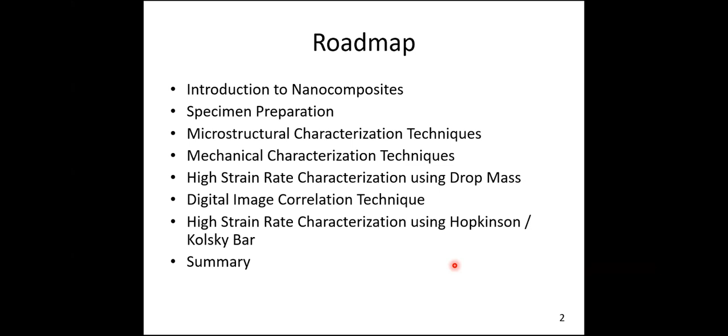So you all know what is nano. Particles having one or more dimensions of 100 nanometers or less, whose physical and chemical properties differ measurably from those of the bulk material, are called nanoparticles. I hope you all from mechanical background know what a nanoparticle is.

There are so many nanoparticles available, and people are doing research on them. Examples include nano clay, nano alumina, and carbon nanotubes. So there are many different types of nanoparticles.

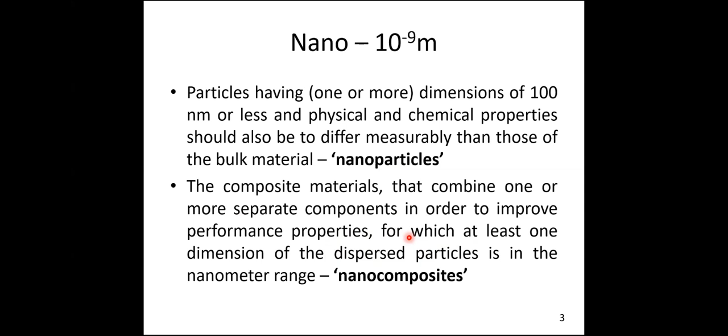Now, what are nanocomposites? In order to improve the performance of composites, if any one dimension of the particle is dispersed in the nanometer range, then it's called a nanocomposite. For example, I can add nano clay with epoxy, and that is called a nanocomposite. Similarly, I can add carbon nanotube with epoxy or polyester, and call it a nanocomposite.

An example is nano clay. Again based on geometry, for nanotubes, the diameter of the tube is at the nano level, while the length of the tube is at the micrometer level, so it is also a nanofiller. Third, we have 3D nanoparticles - spherical, cylindrical, cube - many types available in the market. So based on geometry, we can have nano layers, nanotubes, or 3D nanoparticles.

This is a quick intro about the different types of nanofillers based on geometry.

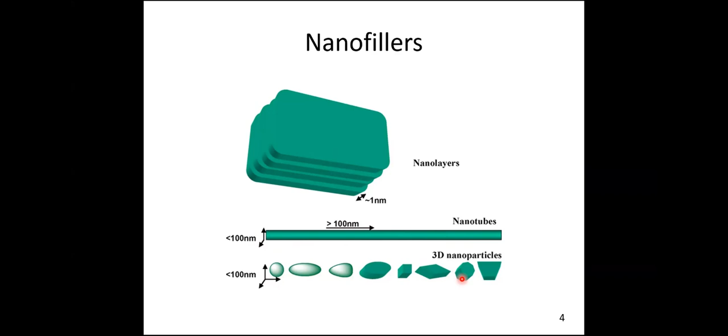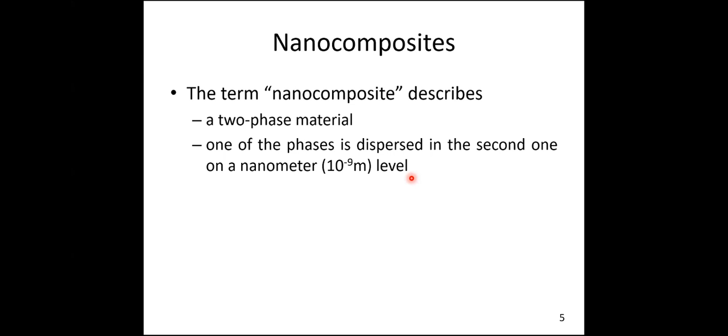So again, as I mentioned earlier, what is nanocomposites? It is a two-phase material where one of the phases is dispersed in the second one on a nanometer scale. So this is called nanocomposites. In today's presentation, I am going to use epoxy as a matrix and nano clay as a nano filler. So it is called nanocomposites, a two-phase material.

So I have given a quick summary about the nano clay. It is also called layered silicate. As I mentioned earlier, it looks like a thin layer, where the thickness of the layer is in nanometers and the length and breadth of the layer is in micrometers. It has about 1 nanometer thickness approximately, and the lateral dimensions may vary from 30 nanometers to several microns.

Because of this thickness and lateral dimension, we can get high aspect ratio. That is why we can achieve very good mechanical properties with the addition of nano fillers in the epoxy. The adjacent layers are separated by a regular van der Waals gap. It is called interlayer. We are going to see this in detail in the upcoming slides.

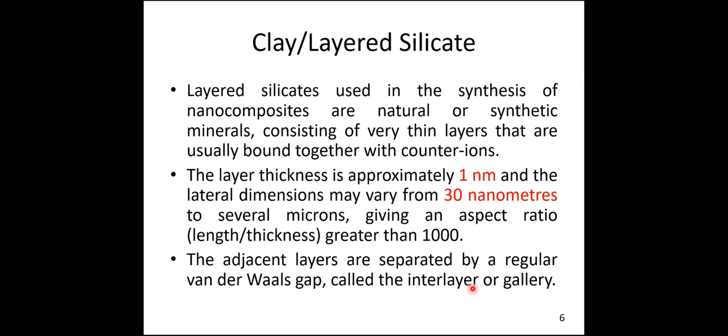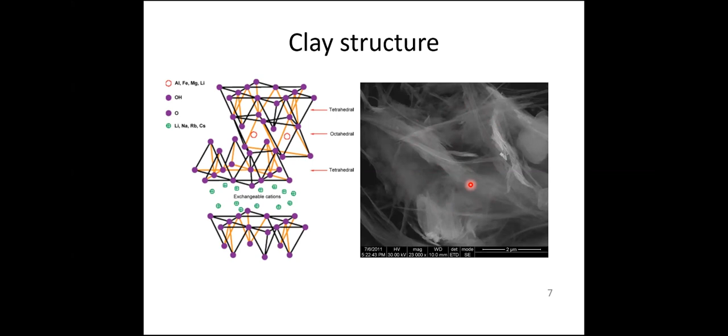Now, types of nano clay. Again, there are so many types. Based on that, I don't want to go in detail. But in this study, we are going to use Montmorillonite clay. It is one type of clay which is commercially available. So in this study, I am going to talk about this MMT clay.

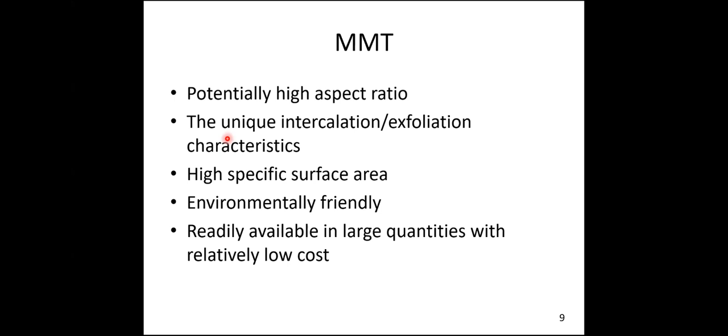So why MMT? Again, there are so many reasons from the literature. It has high aspect ratio. It has unique intercalation and exfoliation characteristics, and it has high specific surface area. It is environment friendly, and it is easily available in large quantities at low cost. Because of this, this Montmorillonite clay is popular in composite research.

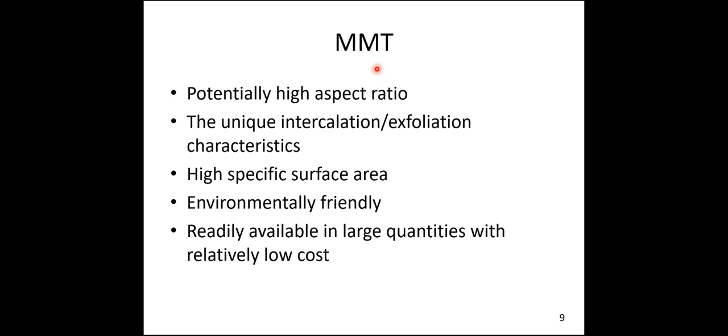So there are so many commercially available clays in the market. I have summarized the commercial names of the clays, starting from Cloisite. It has several types under Cloisites, and Bentone, Nanomer, Nanofil, Dellite. Like that, there are so many commercially available clays available in the market.

In this study, we have used Garamite 1958. This is a commercial name from Southern Clay Products, USA. This Garamite is nothing but a modified Montmorillonite clay. So we have not used a raw clay, we have modified the clay. That is called Garamite, a commercial name. So this is the clay we have used in this study.

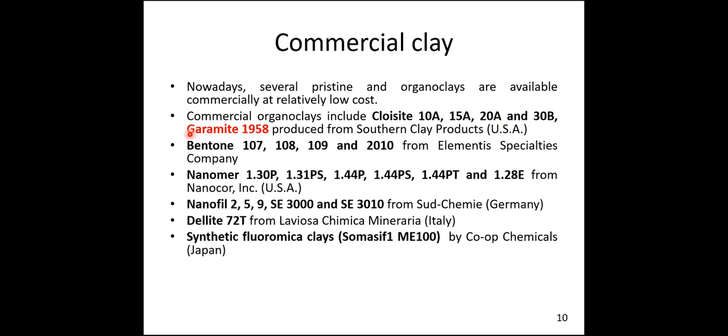Now coming to the dispersion structure. So now I have a clay like this, already mentioned it is in layer form. I can take a pinch of nano clay and mix it with the polymer. The polymer could be any polymer, thermoplastic or thermoset. Here we have used thermoset, that is epoxy polymer. So when I mix the nano clay with the epoxy matrix, what would be the outcome?

So here I have shown, we can expect three different kinds of dispersion types. One is phase separated or microcomposite, another is intercalated where the clay is mixed in an agglomerated stage, and this is exfoliated.

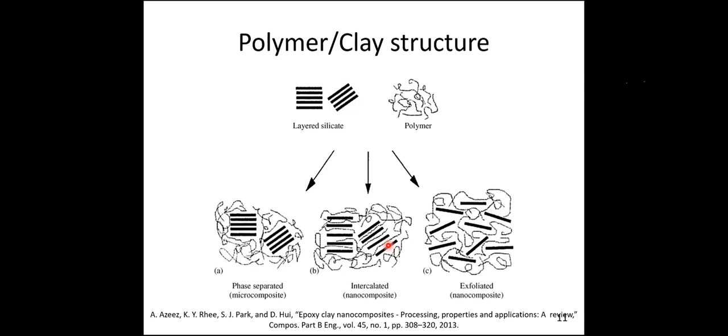So here if you see, the nano clay is dispersed well in the epoxy, so this is the good dispersion we can say. But here, if you see, all the clay has been arranged in a parallel fashion, so this is not good. So these are the three kinds of outcomes we can achieve once we mix the nano filler with the polymer. Let us see one by one in the upcoming slides.

So, history: this nano clay was discovered by the Toyota Group from Japan. These guys were the first to try nano clay with polyamide matrix, and they found good improvement in the mechanical properties by adding nano clay with polyamide. Later it was extended to other polymers, to epoxy, polyester, and so on.

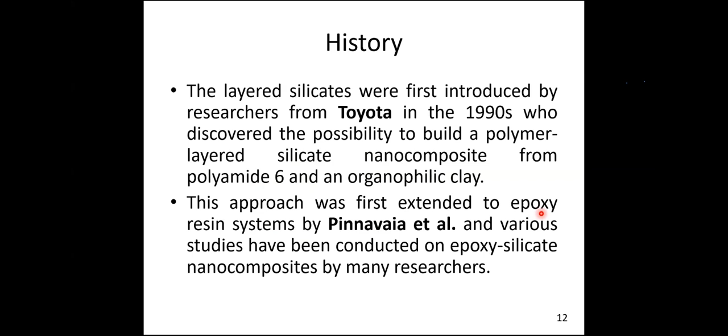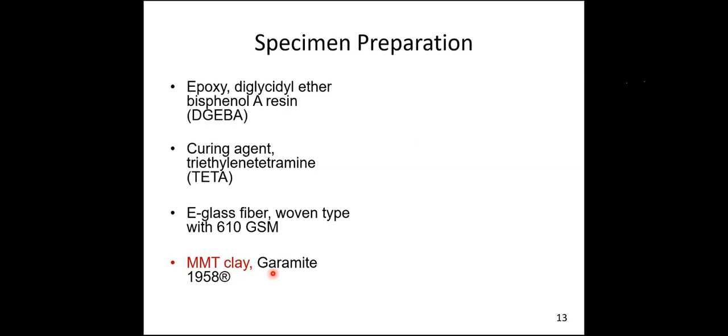So now how to prepare the composite sample? We need a matrix, so we need a polymer. As we are doing this study for aerospace application, we have chosen a DGEBA resin, that is diglycidyl ether bisphenol A resin, which is aerospace grade resin, and we used triethylenetetramine as a curing agent, and also we used typical E-glass fiber in order to understand the effect of clay in composites. And again, as I mentioned earlier, we used modified montmorillonite clay. The commercial name is Garamite. So these are the materials which we have used in this study.

Now I have an epoxy, I have matrix, I have a nano filler. So by mixing the nano filler with epoxy, I will get nanocomposites.

Now, as I mentioned earlier, we cannot blindly mix the clay with epoxy. So we need to take some different clay content. Based on literature survey, we have chosen 1.5 weight percentage, 3 weight percentage, and 5 weight percentage as the nano clay. That means, for example, if I take 100 gram of resin, I can take 1.5 gram of nano clay and then I can mix. So this is called 1.5% epoxy clay nanocomposite. Similarly, I can have 3 weight percentage nano clay epoxy nanocomposite and 5 weight percentage.

You may ask a question: why have I chosen 1.5, 3 and 5? Why have I not gone beyond 5? The reason is, as I mentioned earlier, it is nano fillers. So if I increase the clay content, then we may not mix the clay well with the epoxy. That is why we stopped with 5 percentage. So we have chosen 3 different weight percentages in order to understand which content would be the optimal content for getting better mechanical properties.

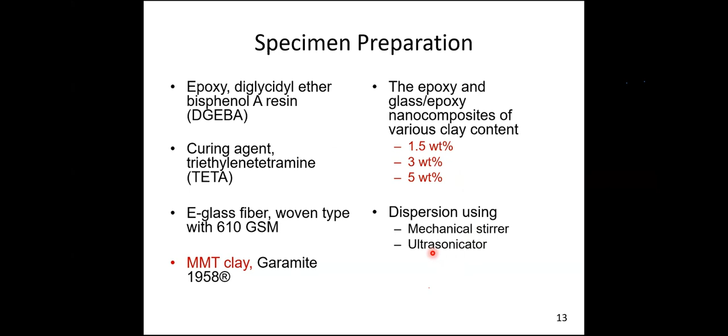So now I will cover these 4 topics. Microstructural characterization.

I wanted to emphasize, why should we go for microstructural characterization? The reason is, as I mentioned earlier, we are dispersing, we are mixing a nano level clay in epoxy. So we need to understand how it is dispersed in the epoxy. As I mentioned earlier, it is a nano size. We cannot see it with the naked eye. So we need to go for some microstructural characterization.

By using these techniques, it is possible for us to understand the quality of dispersion of clay in epoxy. So from that we will understand whether the clay is mixed well in the matrix or not. For that reason, we have used these 4 different techniques. I will be going one by one.

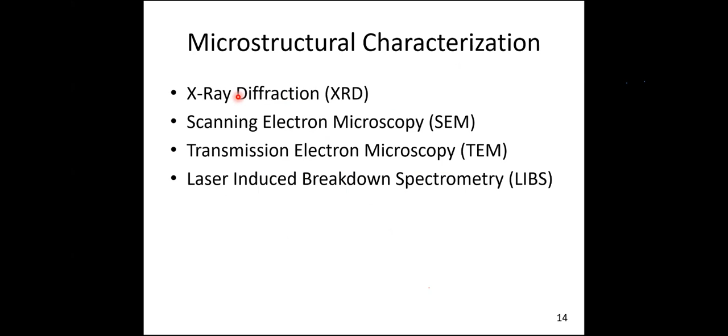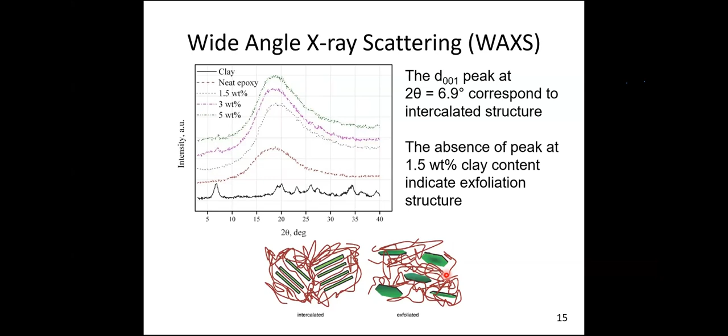Whereas, if you see, this is exfoliated structure. Again, for 1.5% there is no peak, which indicates that the clay is mixed well with the epoxy. That means the distance between the 2 layers is more than 7.75 nanometers. So that is the meaning, that it is dispersed well. So from the XRD, we were able to confirm that 1.5% clay is dispersed well with the epoxy.

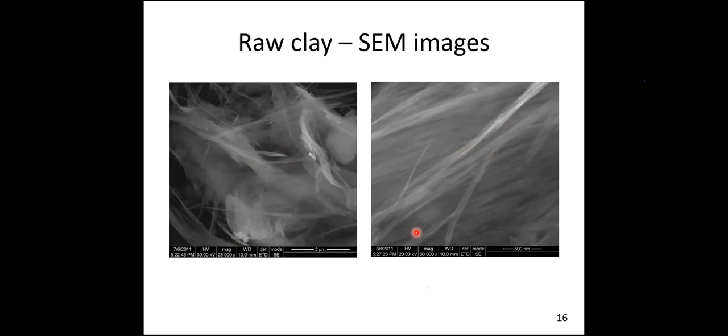So again, this is a typical scanning electron micrograph of raw clay at different magnifications. It is at low magnification around 23,000x, whereas here it is 60,000x. It is not dispersed with epoxy, it is just raw clay. I just wanted to show how clay looks like. If you see carefully, it looks like a layer. It has a nano size thickness and micron size lateral dimension. So basically it is typically a layer, like a sheet of paper. So this is what we could see from the micrograph.

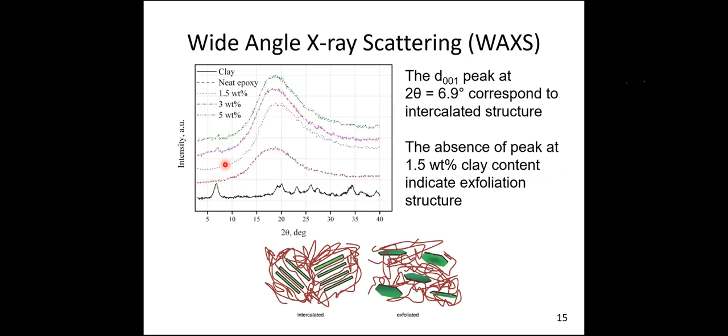We also performed small angle X-ray scattering. The idea is, as you saw in my previous slide, my first peak was observed at 6.9 degrees, but we could not go below 5 degrees. For that reason, we went for small angle X-ray scattering, so we could access smaller angles.

Here you could also see that black is clay, red is 1.5, where 1.5 doesn't have any peak, which means the clay is dispersed well with epoxy. The 3 and 5 compositions have a peak at around 5 degrees, which means the dispersion is not good, it is agglomerated.

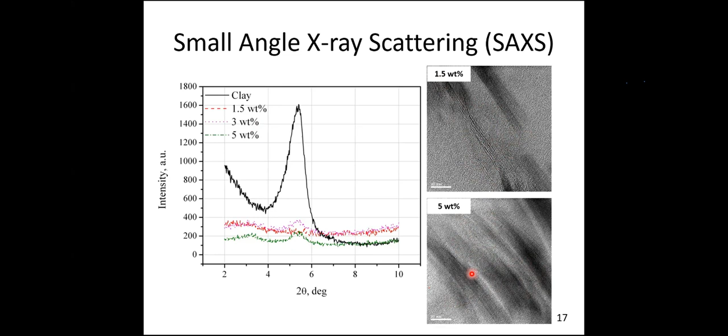This is a TEM, the micrograph from transmission electron microscopy. For 1.5 weight %, you could see it is dispersed nicely, whereas at higher clay loading, you can see it is agglomerated. This is what we could see from the XRD and transmission electron microscopy.

Also from scanning electron microscopy, we wanted to understand the composition of the nano clay epoxy composite. It has basically magnesium, aluminum, and silica.

We also tried laser induced breakdown spectroscopy for our research work. This study was also used in the Chandrayaan mission, so I had the opportunity to do this testing under the guidance of Professor Nilesh from IIT Madras.

From laser induced breakdown spectroscopy, we could see the epoxy has hydrocarbons, whereas the epoxy clay has magnesium, silicon, and aluminum. These are the alumina, the main composition of the clay.

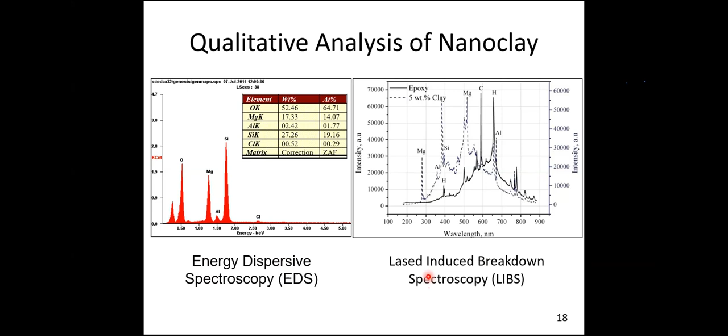This we have confirmed from EDS and LIBS, that is energy dispersive spectroscopy and laser induced breakdown spectroscopy. So we have just confirmed the composition of epoxy and clay.

This is a small study. We wanted to understand the effect of clay, and we were curious to know the energy required for the laser plume. So we did it for two different samples: one epoxy clay, the other glass epoxy clay.

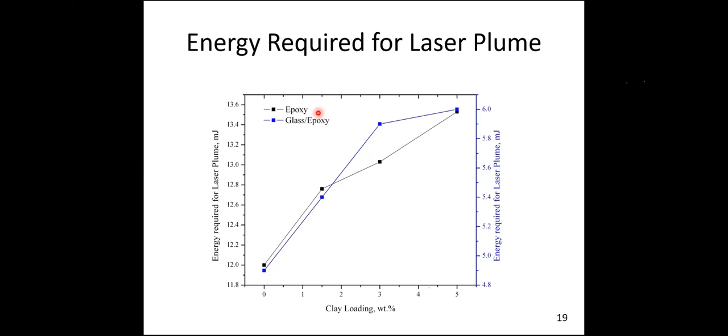On the left hand side, for epoxy and glass epoxy, it requires less energy to make the laser plume, whereas if I add the clay, it needs more energy to get the laser plume. This is what we could see from this graph.

So now we have finished the microstructural characterization. From the XRD, that is X-ray diffraction, and from transmission electron microscopy and scanning electron microscopy, we have understood the dispersion of clay in epoxy. We noted that 1.5 weight % clay gave good dispersion, whereas 3 and 5% gave an agglomerated structure. This is what we found from the microstructural studies.

So now the samples have been prepared, and the dispersion of clay in epoxy has been understood. Now we need to go for the next level, macro level testing. The main aim of adding the nanofiller with epoxy is to improve the properties, and that is why we prepared all these samples.

Now we are going to see, in a nutshell, the effect on mechanical properties, thermal properties, and electrical properties with the addition of clay in epoxy. Let us go one by one.

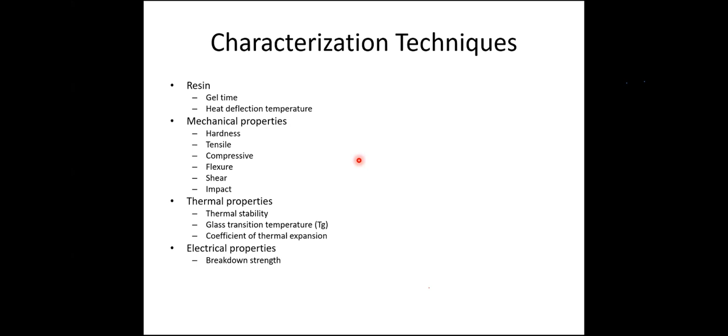I have not gone into detail, and I am not going to go into detail. I just want to give a glimpse of what kind of improvement you get with the addition of clay. This is what I wanted to focus on.

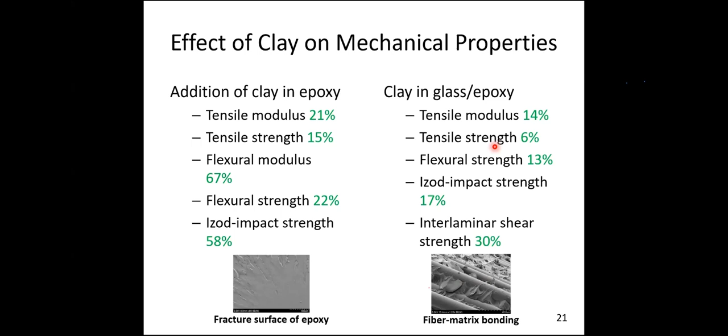If you see the bottom figure, this is a scanning electron microscopy image of a failed sample. Because of the addition of clay, one can see a strong bonding of matrix with fiber. Because of this strong bonding, we could get better mechanical properties due to the addition of clay in the glass epoxy composite.

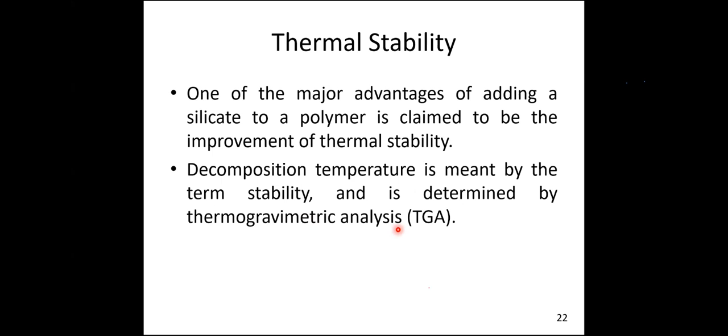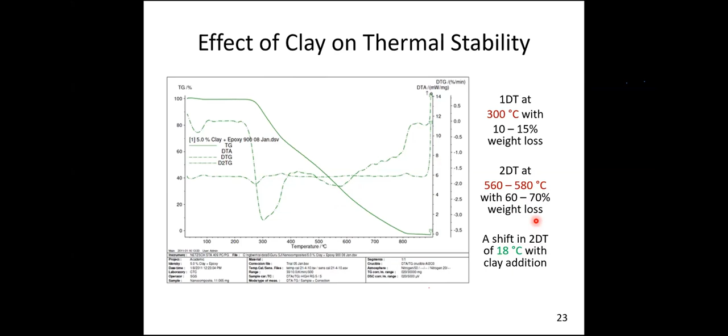So what is the outcome? With the addition of clay in epoxy, we could see a shift in the decomposition temperature. Because clay is a ceramic material containing silicon and alumina, we got better thermal stability. This is what we found from the thermal properties.

Then coming to electrical properties. We have already seen the effect of clay on mechanical properties and thermal properties. Now finally we come to electrical properties. We made different samples, epoxy samples and clay epoxy samples, and applied a high voltage to see its breakdown voltage.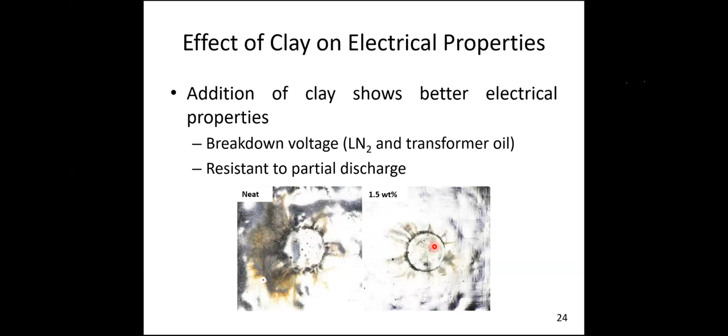If you see the photograph of the neat epoxy without clay, there is major damage, whereas on the right hand side, the 1.5 wt% clay epoxy shows minimal damage. Because of clay, the breakdown voltage is increased with the addition of clay in epoxy. This is what we found from the electrical properties of epoxy clay nanocomposites.

So we have seen, quickly I'll give you a summary of what I have discussed so far for better continuity. Initially I talked about nanofillers, nanocomposites, and the history of nanocomposites, then how to prepare nanocomposites and the raw materials. Then I talked about microstructural characterization starting from XRD to SEM to TEM, and we have seen the effect of clay on mechanical, thermal and electrical properties.

So now we have understood what a nanofiller is, how to prepare a nanocomposite, and how to do the characterization of nanocomposites. We have also noticed that the addition of nanofillers in the matrix leads to significant improvement in mechanical, thermal and electrical properties.

Now I'm going to take you to some advanced characterization techniques, which is the main agenda of today's talk. I'm going to spend some time on this. I hope all of you are aware about strain rate. Here I have given a brief summary about strain rate. In general, composites are rate sensitive.

For example, when I pull the sample slowly, I will get some kind of mechanical property, a tensile property. Similarly, when I pull the sample at a high speed, rapidly, the properties may differ. This is called rate sensitivity.

So I will come to this point: why do we need to understand the rate sensitivity of composites? Let us go one by one.

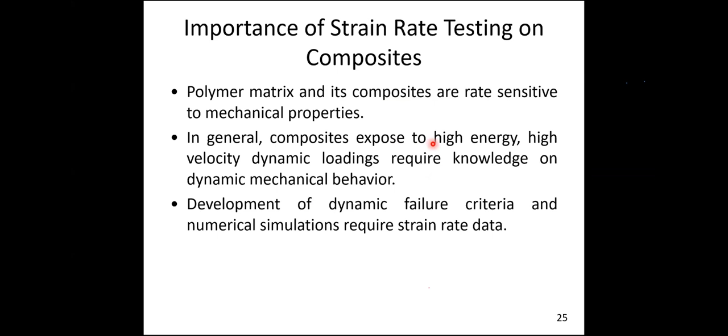So here I have shown how to carry out studies using different experimental techniques. One is the conventional loading frame, which is available in institutes, the basic UTM, universal testing machine. With that, you can achieve low strain rate. And if you have a servo-hydraulic testing machine, you can achieve medium strain rate. We can also use a drop mass setup to achieve intermediate strain rate, around 100 to 1000 per second.

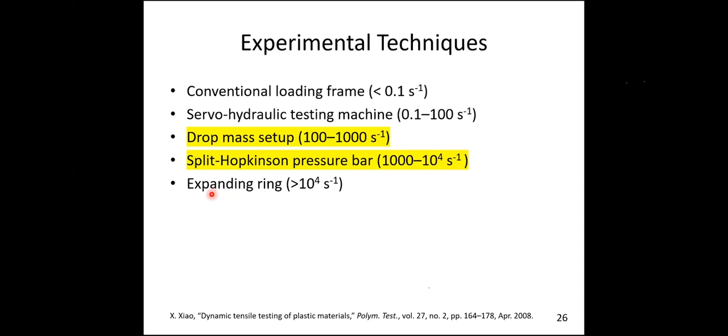And to do high strain rate, very high strain rate studies, you can use the split Hopkinson pressure bar, or Kolsky bar, where you can achieve up to 10,000 strain rate per second. And if you want to do ultra high strain rate, then we can go for the expanding ring technique, that is above 10,000 per second.

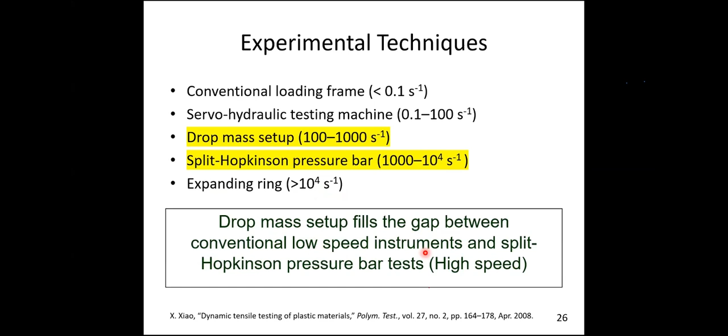So in this study, I'm going to focus on the drop mass setup. This is a nice technique which fills the gap between the conventional low speed and high speed instruments.

So now here I have given the strain rate regime. As I mentioned earlier, the low strain rate is categorized from 10 to minus 6 to 10 to minus 3 per second. It's called quasi-static. So we use conventional cross-head devices, and from this we determine the properties of samples, say tensile strength or tensile modulus, and so on. So this is called quasi-static testing.

And for medium strain rate, it is intermediate. We use servo-hydraulic machines and drop mass. The example is plane crash. This is the typical example. So when two planes crash at this junction, the material may experience this intermediate strain rate. So this is what I wanted to convey. So it is ranging from 10 power minus 3 to 10 power 2.

Again, high strain rate ranges from 10 power 2 to 10 power 6, where we use Hopkinson pressure bar. The application is bullet impact and blast applications, where this high strain rate will be experienced. Again, for ultra high strain rate, we use Taylor impact and plate impact, with applications like nuclear explosion. In these areas, the material may experience ultra high strain rates.

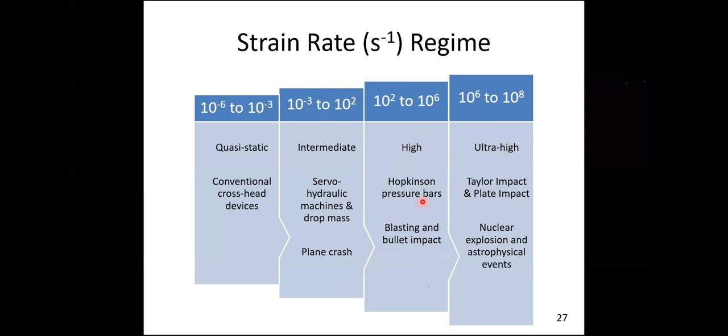Before that, you should understand what is strain rate. It is nothing but the crosshead speed divided by the gauge length. The gauge length is in millimeter, and the speed is in millimeter per minute or per second. So when you divide, you get strain rate. So this is what I want to convey.

So with the help of a drop mass setup, we can achieve from 10 to 1000 per second strain rate. It is inexpensive and can accommodate different geometries, so we can get different variations of strain rate. This is the typical drop mass setup which was developed at IIT Madras. You could see here.

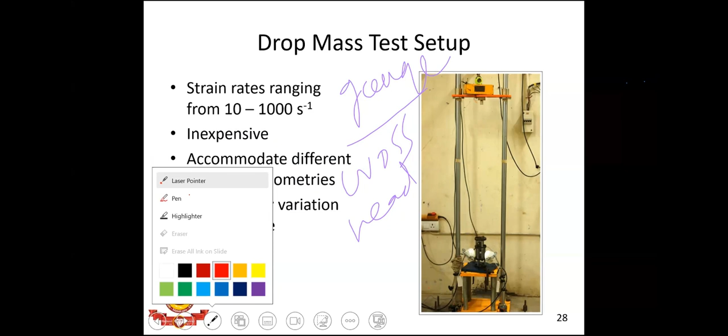Now you may ask a question: how to achieve high strain rate by simply dropping the mass? The idea is, again, V is equal to root of 2gh. From that energy principle, we know that velocity is equal to root of 2gh, which means higher the height leads to higher the velocity. So from this only we can get different strain rates.

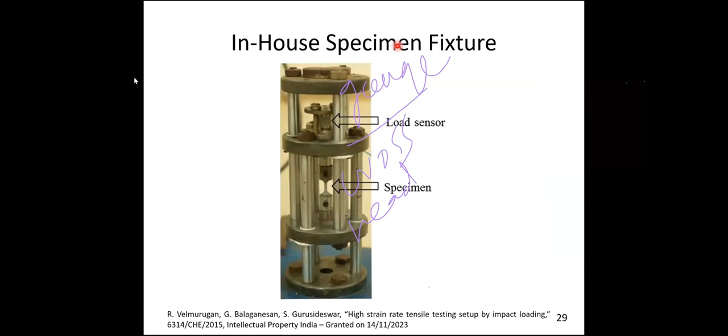So this is the picture which we designed to do that high strain testing. For example, if you see, you can just observe my laser pointer. When the drop mass hits that fixture at this point, then the sample will fail in the tensile mode.

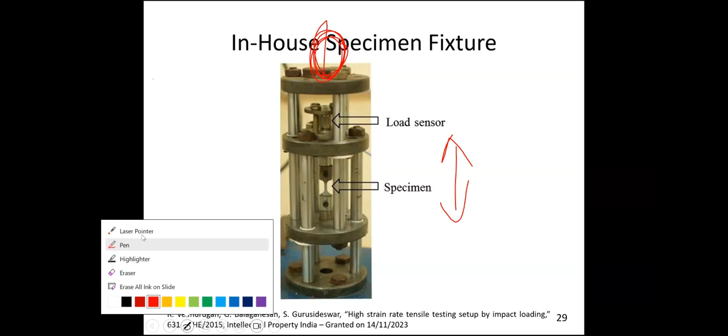So when the mass impacts at this point, maybe I can show with the pen. When the mass hits this place, the sample will try to fail in a tensile mode. So this is the principle behind this, this is what we have used. So just by dropping the mass, it is possible for us to apply high strain rate loading to the composite sample. This is what I wanted to convey.

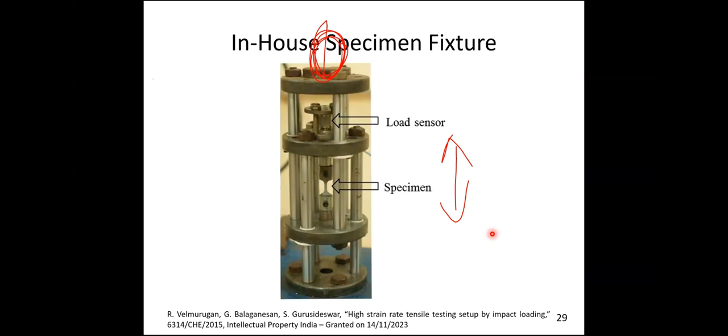So if you see this picture, we have a load cell, the PCB load cell, piezoelectric load cell. From this, we get the load data. Again, to get the strain data, we have used a digital image correlation technique, that is non-contact strain measurement. I am going to show in the upcoming slide. From that we got the strain data, so we could plot the stress strain curve. From the stress strain curve, it is possible for us to understand the effect of strain rate.

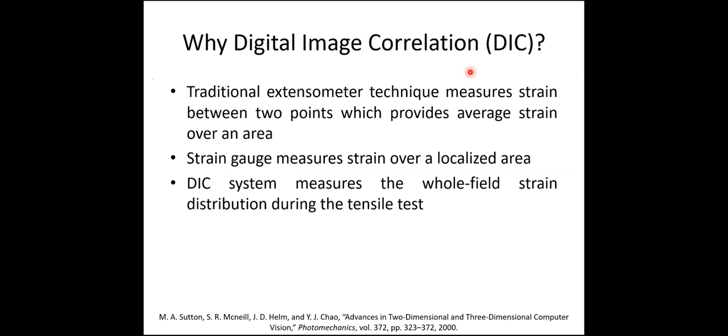So why DIC? I hope you are all familiar with the instruments. When you do a typical tensile testing, we use extensometer to measure the strain. In some cases, we use strain gauge. If you use extensometer, it gives strain between two points, correct? Similarly, if you use a strain gauge, it measures strain over a small area. But with the help of DIC, digital image correlation, it is possible for us to get the strain over the whole area. So this is one advanced technique which we have used in this study to get the strain data.

So the application of DIC is very, very large. It is used in fluid mechanics. It is used in fracture mechanics. It is used in many applications. Anyway, I am not going into this in detail.

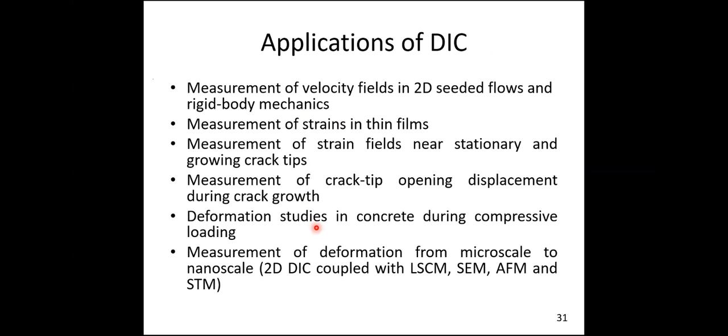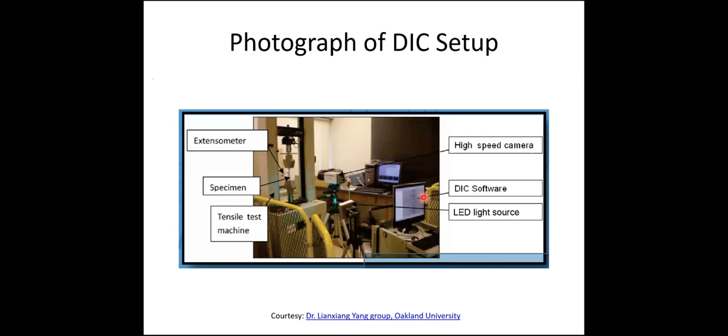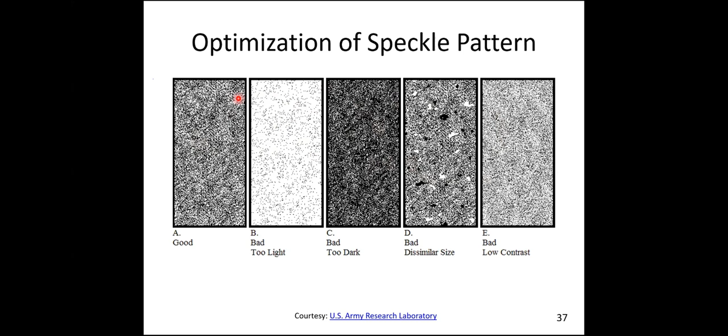So there are so many parameters in the DIC technique, so one has to optimize the parameters. Again, I'm not going into this topic because of time. I want to focus on the results of the high strain rate studies. So this is the different speckle pattern. We can get this pattern either by using a spray paint or by any other mode. So from the pattern only we can get that strain data.

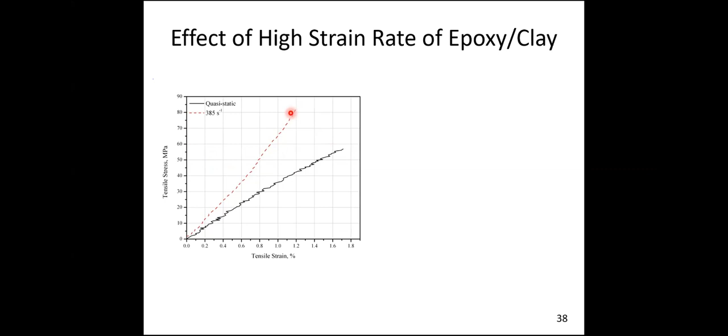This black curve shows the testing done at low speed, that is, quasi-static. It failed at around 50 megapascal with a strain of 1.6%. Now, if you test the same sample at high speed, there is a drastic increase in strength, going from 50 to 80 megapascal. Again, the strain has been reduced and the stiffness is increased.

So what I want to convey from this slide is that if you use an extensometer or any strain gauge, you may get only numerical data. But when we use this digital image correlation technique, it is possible to get qualitative data, and also a more in-depth understanding from the given sample. So this is what I wanted to convey.

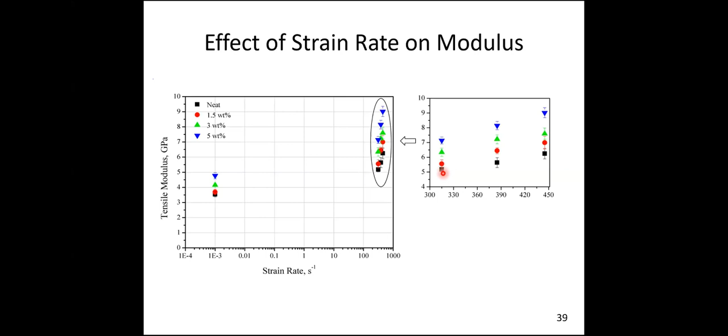For example, the black is the epoxy, where we got 5 gigapascal as tensile modulus, whereas the blue is the 5% clay sample. With the addition of clay, we get an improvement from 5 to 7 gigapascal. This is what I wanted to convey to this forum.

Similarly, this slide shows the effect of strain rate on strength. So this slide shows modulus, and the next slide shows strength. Again, we could not get good improvement at 5% because, as I mentioned earlier, 3% and 5% lead to agglomeration. Because of agglomeration, the sample leads to premature failure, and also some voids were formed due to the higher content of clay.

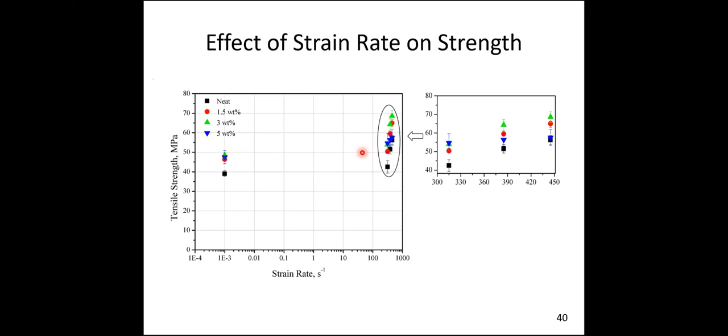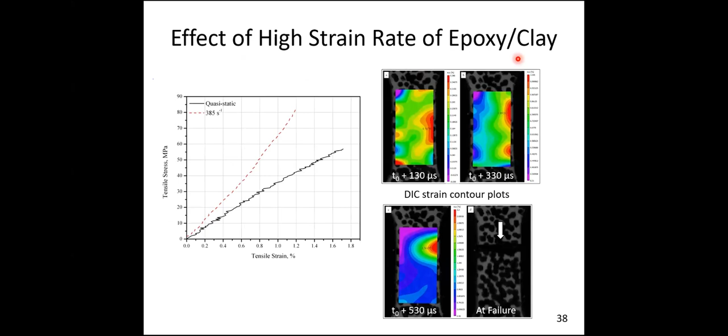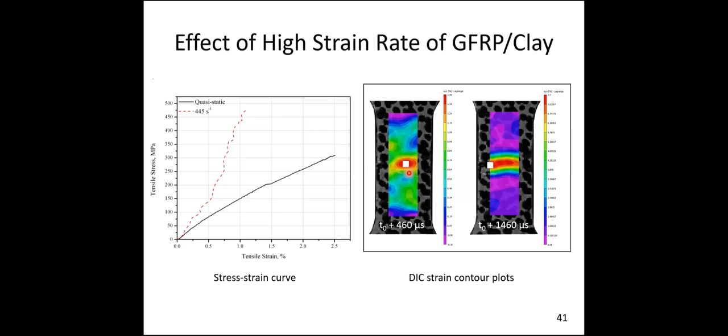So from this, what we understand is that testing at low speed gives certain properties, while testing at high speed gives different properties. This is what I wanted to convey to this forum. This is the figure just before failure, and you can see the strain localization.

Now coming to the micrograph, I think I'm running out of time, so I'll come to the conclusion. We also wanted to understand the effect of strain rate from the failed samples. We made the samples, tested them, and now we have the failed or fracture samples. These fracture samples were taken to scanning electron microscopy to understand their behavior.

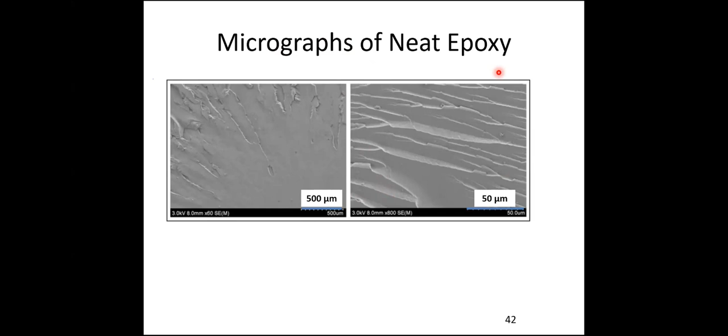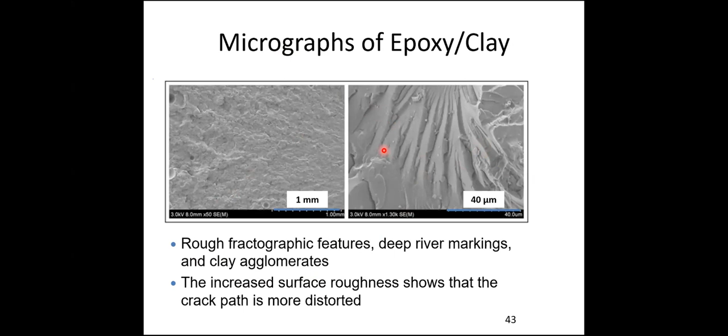So again, this is the micrograph taken from the high strain rate samples. If you see at quasi-static, the samples were very smooth, but when we see the fractography at high strain rate, you can see a typical cleavage structure with a very rough surface. So what I want to convey is the addition of clay shows secondary cracks and more deeper river markings.

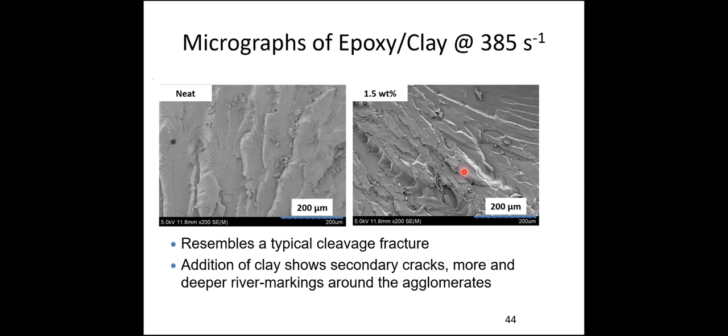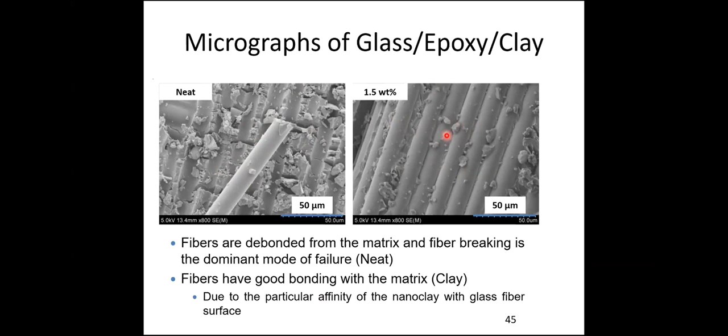Again, this is the micrograph of glass epoxy clay. For neat samples you can see fiber breakage, but for the clay samples, you can see a strong bonding of the epoxy clay with the fiber. Again, at high strain rate, we could see fiber breakage and complete debonding of fiber from the matrix.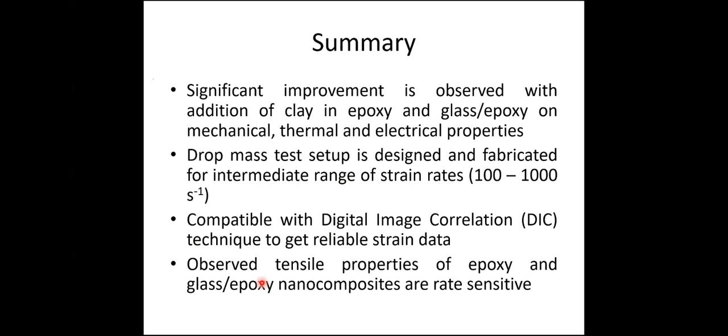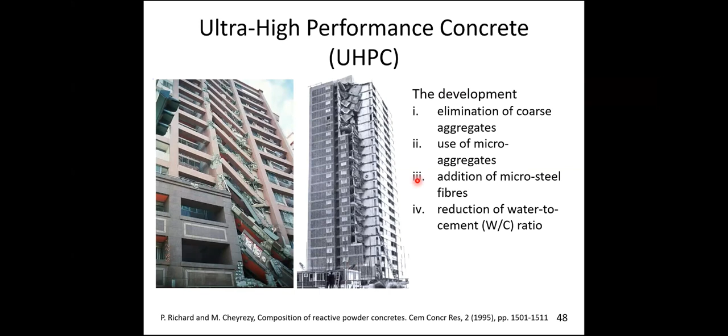So give me another 5 minutes, I will cover this other part, maximum 5 minutes. This is the work which I have done for my postdoctoral work. I will directly go to the experimental technique.

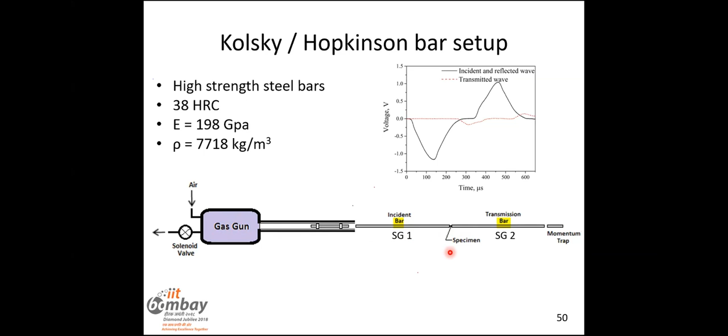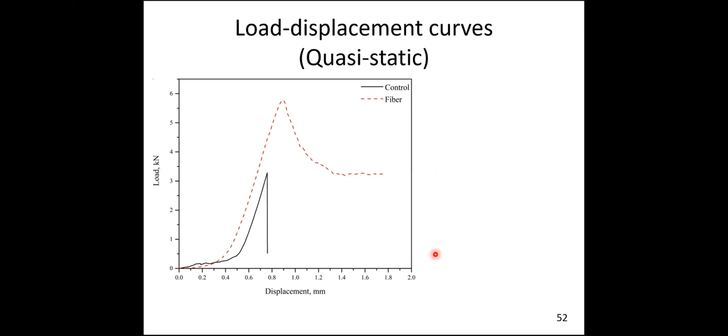So these are some of the force history results from that study. Just I want to show the microstructural studies of this sample. Basically, we used ultra high performance concrete in the study, and we wanted to understand the high strain rate behavior of this concrete.

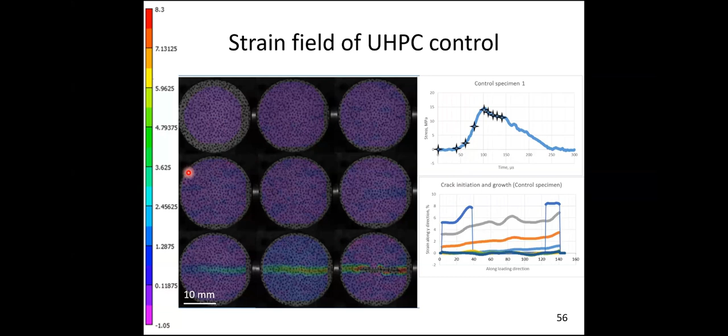Crack initiation starts at 90 microseconds. At 107 microseconds, you can see a big crack. Again, this is for one sample, and this is for another sample. You can see how the crack has propagated with respect to loading. So you can see here, at different time steps, I have given the crack growth, and this is the final failure of the sample.

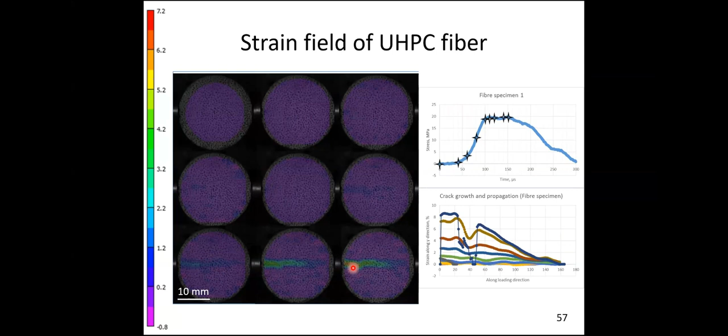So again here, this is for another sample. You can see the crack is initiated, the crack is propagated, and finally it leads to failure. This is what I wanted to convey.

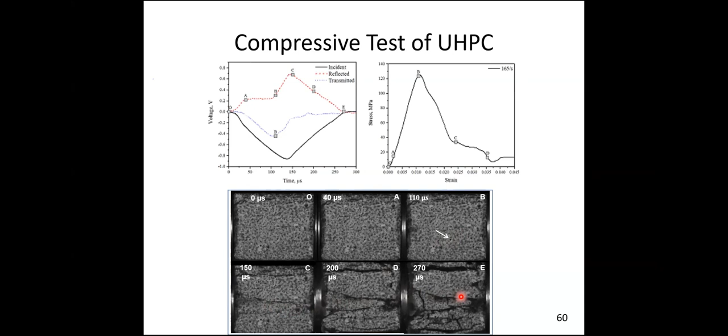So these are some studies for compression testing. Again, you could see how the concrete fails with respect to high-speed loading. You can see the arrow mark - this is the place where the crack is initiated, and then it has propagated, leading to a number of cracks, and finally to failure of the sample. So I just wanted to convey how, when concrete is subjected to high strain rate loading, crack initiation leads to the final failure of the sample. I don't want to go in depth.

So again, summary, as I mentioned, similar to composites, concrete also is very sensitive to strain rate, and we were able to incorporate high-speed DIC technique to understand the failure pattern.

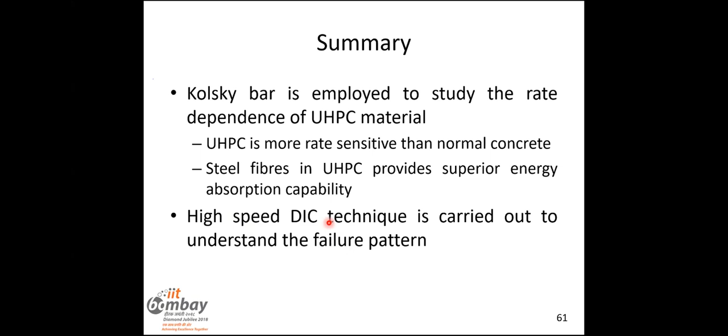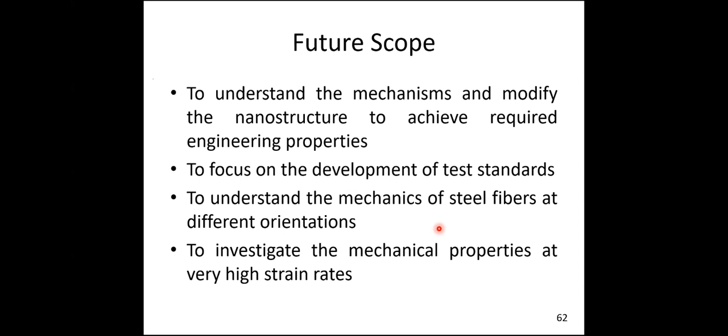At this juncture, I would like to acknowledge my PhD supervisor, Professor Velmurugan, and other collaborators from engineering design, electrical engineering of IIT Madras. Also I would like to acknowledge my postdoc mentor, Professor Krishna Jonnalagadda, and Professor Prakash Nanthagopalan from IIT Bombay for their support in doing these studies.

Thank you all for your patient listening. I stop my presentation.